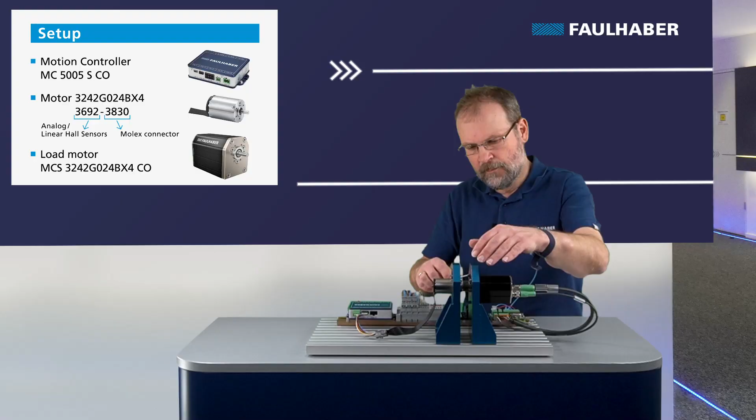And now I connect a load here, so that's the motor on your right side, and I have to tighten the coupling here. Basically that's the same motor, but here having integrated electronics, that's the MCS 3242 BX4. Both of them are connected to the same CAN, because then I can easily switch between the two of them in the Motion Manager, and both of them are connected to the same 24-volt supply.

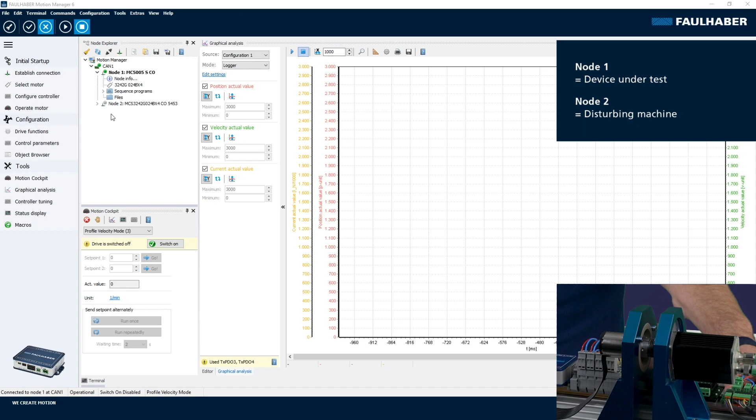The motor, by the way, is generating a nominal torque of roughly 50 millinewton meters at a nominal speed of 4,500 RPM. So let's switch to the Motion Manager and check the effects. Okay, back in the Motion Manager, but now we do have two of these drives in the device tree here. That's of course our device under test, the one that we used in the previous videos too. And here's the second one, our MCS, which I'm going to use as the disturbing machine here.

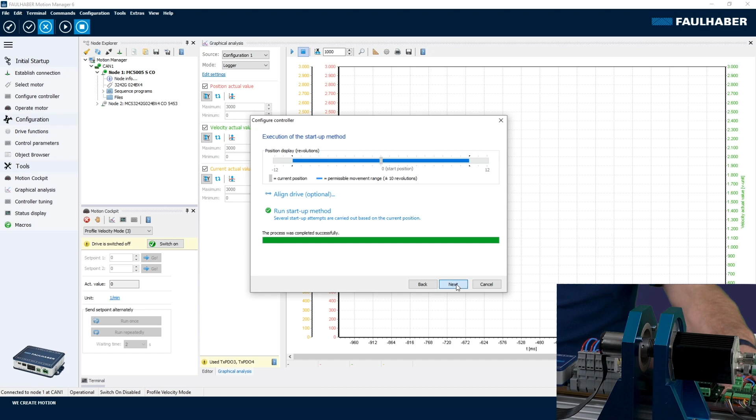Once again, identify the inertia. Shouldn't be a problem here in the setup, so run the startup method. And check the result, the inertia of the device under test, so our motor here, and here is the inertia that's been identified for the load.

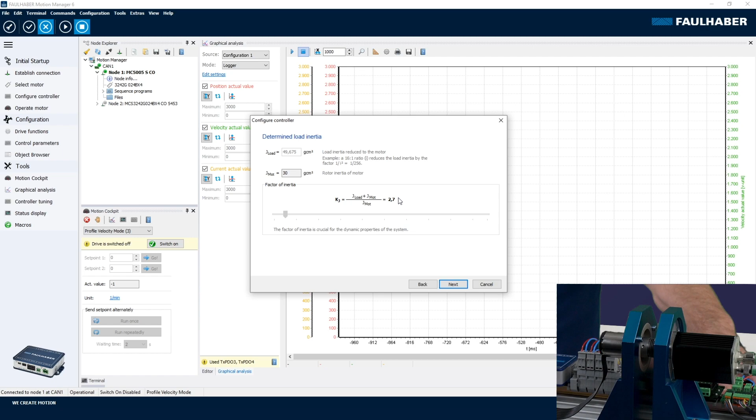That's reasonable because it's the same motors, so of course the motor alone would again be a value of 30 grams centimeter square here, but we do have additional coupling, so a little more than a factor of 2 compared to the inertia of the motor would be the total inertia. That's fine. Let's transfer the parameters here. We are finished, and yeah, I can save the changes.

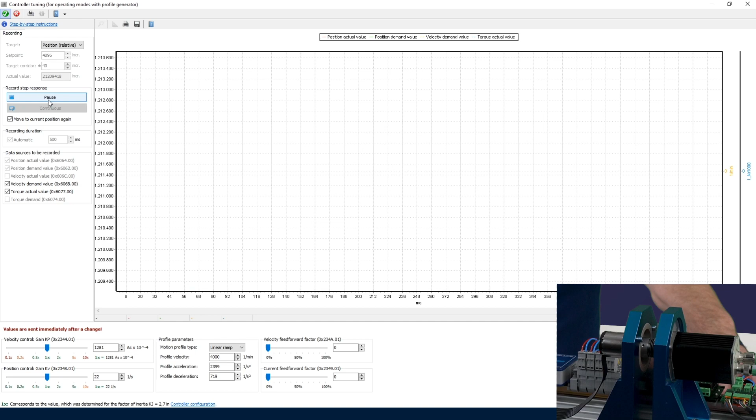Within the controller tuning, to see the difference, of course I can do the first step here in speed, and the same single step of position, and we meanwhile know it's going to be pretty slow here, but by increasing the feed forward, applying all the feed forward values, and doing once again one step, we would have pretty good following. But compensation for disturbance might not be ideal, and that's what I'm going to show. So save the parameters

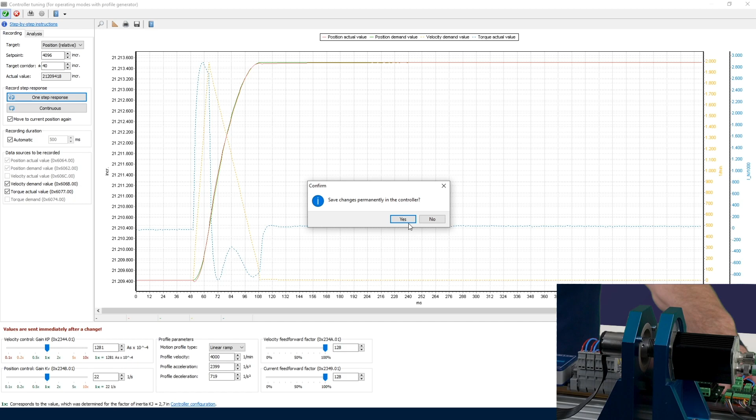and leave the tool, because now I need to use two of them, so my device under test and the disturbing one, and that's better in the standard view here using the motion cockpit. First step is to run this motor. I'm using the motion cockpit. Select the profile velocity mode, enable that one, and run the motor at a constant speed here, 1000 RPM is fine. And then I directly switch to my second one here.

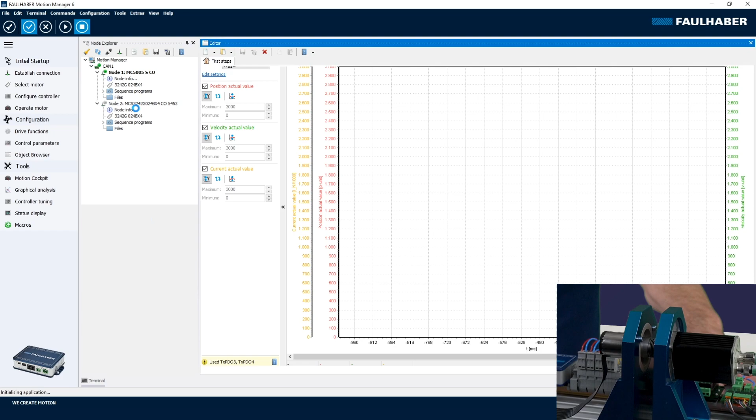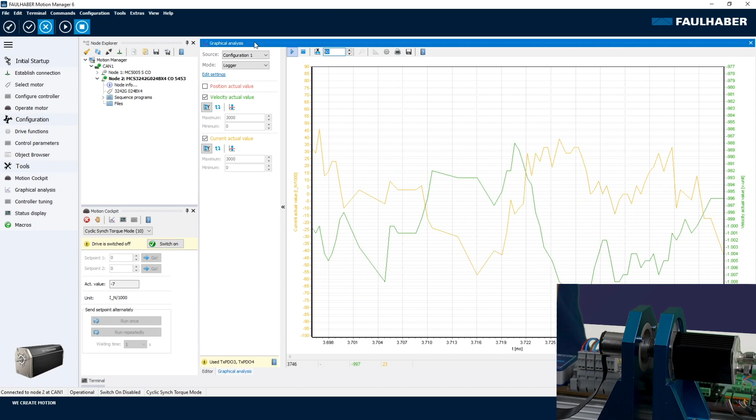And can directly check what's happening. So what we do see, well, let's increase the scale here, is speed and torque, and it's now minus 1000 RPM, because it's of course the inverted speed of the first motor. First motor had a plus, and now we have the minus here.

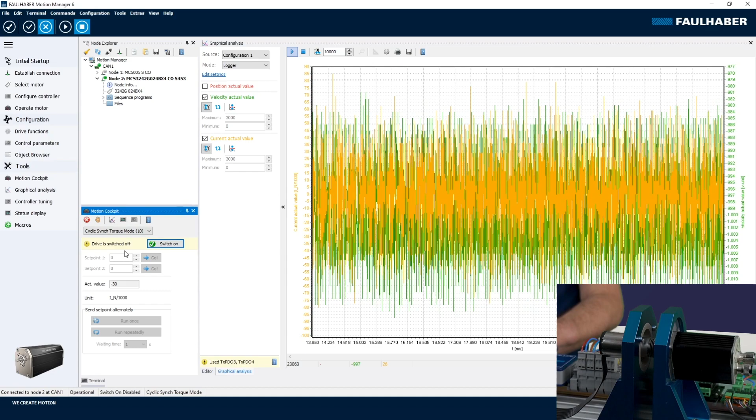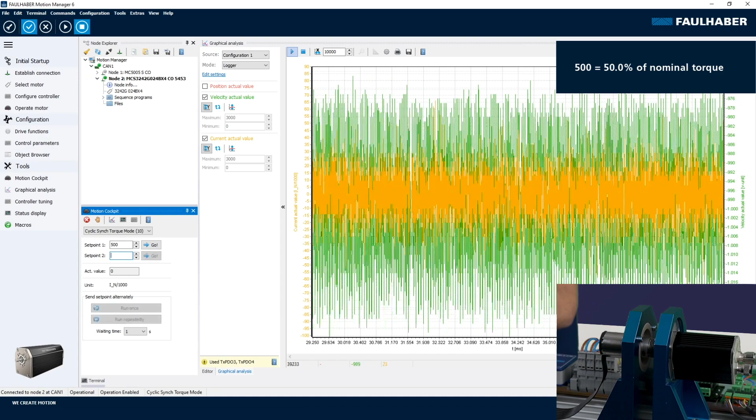Switch to cyclic synchronous torque mode, activate it, and apply disturbing torque. I will go for plus 50 and minus 50% of the nominal value of this motor, which is a numeric value of 500 here. Well, that one would have to be a minus 500. And apply them repeatedly, and we can directly see the effect. The speed is more or less constant, but the torque is alternating here.

But we don't see too much about the changing speed here, and even using the magnifying glass, the time resolution isn't really perfect for analyzing this disturbance here.

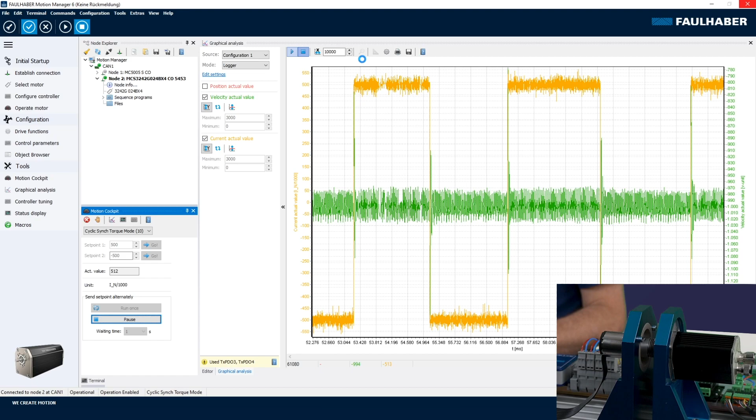Okay, to change this, what I can do is use the settings of the graphical analysis and add a trigger source here. That's what I did, the torque actual value, adding it here, and the recorder would then be, well, we could either use every sample that we would get, that is a sampling of every 100 microseconds, and the trigger value, we are switching between -500 and +500, so let's use a threshold value of 0 and add a small negative delay here in order to get a few values recorded before the actual trigger event.

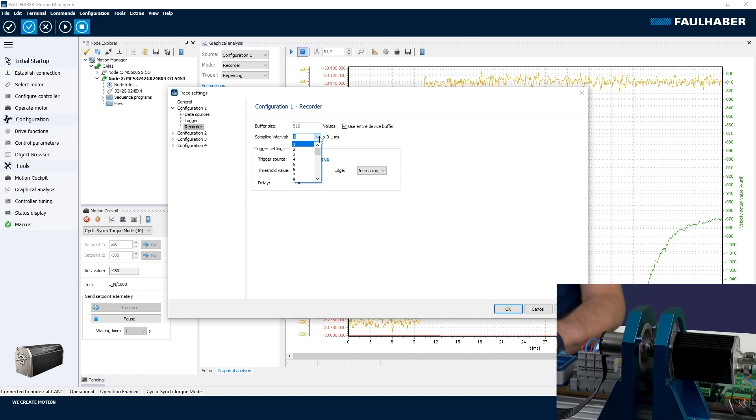So that's fine here, and switch back and activate the recorder and have this in a repeated mode. And now let's see the result here. So we can see there's a significant change in the speed, but the timing resolution isn't too perfect. So stop this once again and change the timing resolution a little bit. So that's in recorder settings, not every sample, but let's take every second sample only. And don't need the position, restart, and let's check what we are seeing here.

Okay, here we are. I can use the ruler to actually measure what's happening here. So here is the lowest value and here's the biggest value of this speed deviation, and you can see it's close to 300. It's 290, the deviation that we get as a maximum reaction to this disturbing torque. Then time here roughly starting at 20 milliseconds, and we are back in the corridor over here at about 55 milliseconds. So this would be a reaction time of 35 milliseconds. Okay, so far the untuned case.

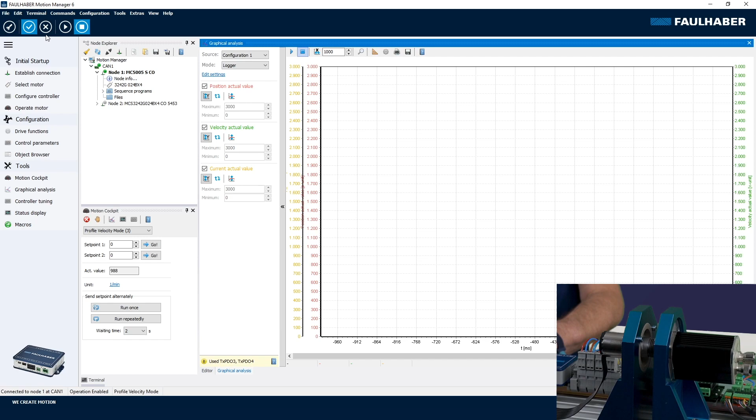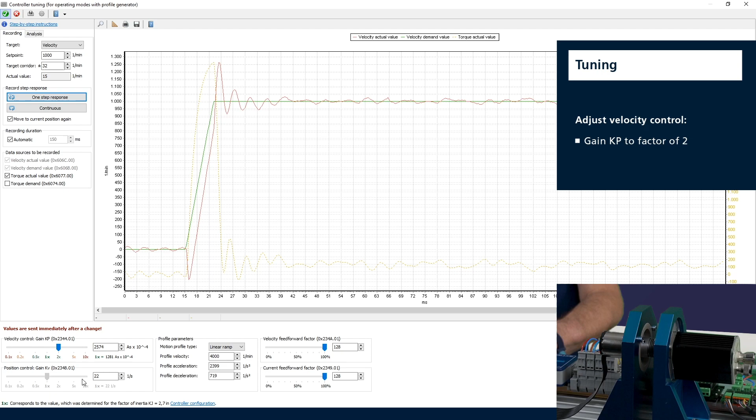I'm going to stop the motor here, switch back to the original one, the device under test, and stop that one too. Use the controller tuning window to adjust the gains. So let's try with a factor of 2 for the velocity loop. Yeah, seems to be fine. It's stable. And position. Well, we don't use position control here, so it doesn't really matter. But anyways, let's follow the procedure. Perfect following, and let's save the parameters here and leave the tool.

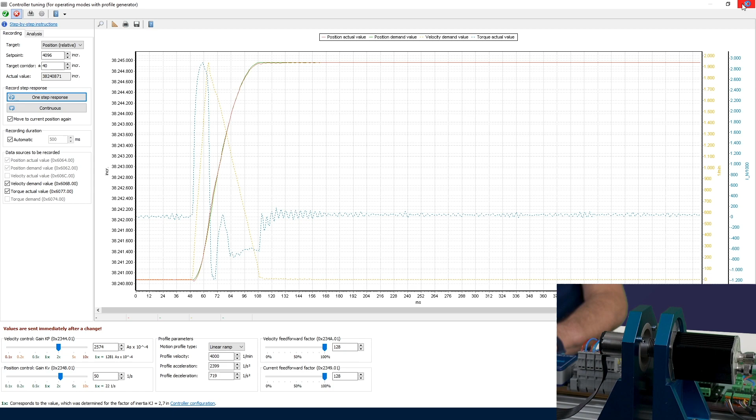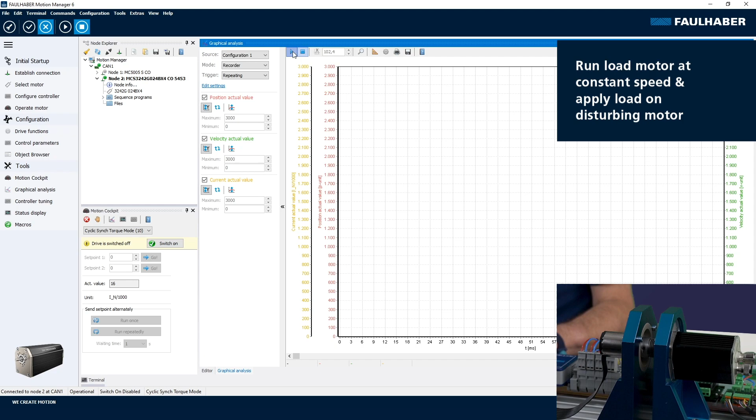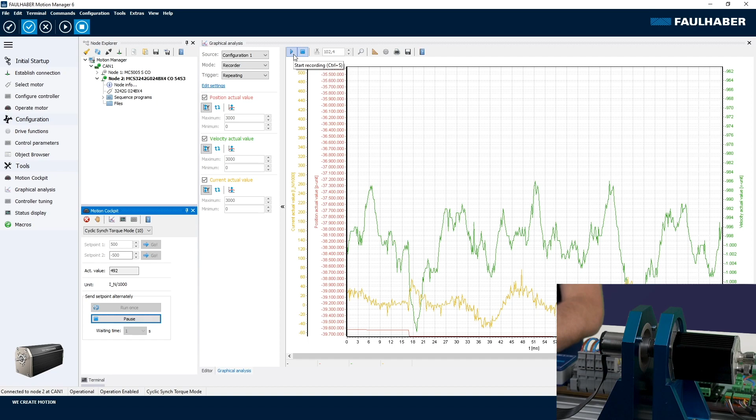And now, same, first starting the device under test here at the speed of 1000 RPM. And switch to the second one. Okay, and I can directly start the recording and switch on and apply disturbance. +500 and -500. And apply that one here. Okay, start the recording and disable the position information here. And can stop recording once again and use the ruler to check the result here.

So here's the first point, and then there's the second one here. So now we do have a deviation in speed of 170, so that's roughly 2/3 of the one that we had in the untuned case, and even the time here from starting the deviation at 20, we are back in the corridor roughly here, so that would be 20 to 25 milliseconds, so even the duration of the deviation is reduced to 2/3 of the initial one.

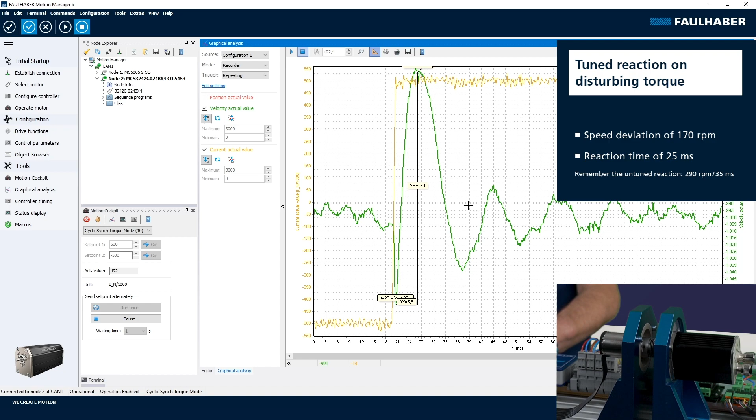So that's why it's important to tune and optimize tuning. It's not about following a command. The profile generator cares for that. It's to compensate disturbance. That's what I wanted to show when we have to deal with disturbances. So usually the speed loop is tuned exactly that way because we can't predict whatever disturbance we are going to have, while the built-in profile generator is dealing with perfect following.